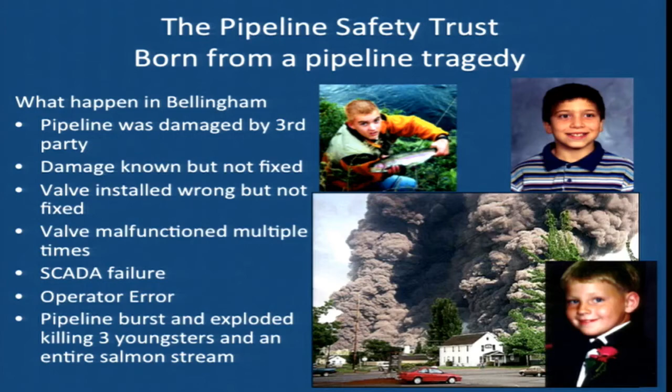Yep. SCADA, yes, I shouldn't be using acronyms. That's basically the computerized system that allows the operator in a control room, usually far away. A lot of the pipelines are controlled from Houston or Calgary or somewhere else. This one was south of Seattle, to monitor the pipeline, and they can shut off valves, increase pressures, reduce pressures, that type of stuff. And I should be able to tell you what SCADA means, but I bet one of the hecklers can tell us. Supervisory control and data acquisition. That's what I was going to say, yeah.

So ever since we came into being in 1999, there was a group that formed before the Pipeline Safety Trust Incorporated. We have really focused on changing federal law because, as you've heard this morning a little bit, most all of the pipeline safety regulations start at the federal level. The federal government sets the minimum standard. So we really focused a lot in the first 5 to 10 years of our existence on the feds and on Congress. And we've had success there. We've snuck a number of things into reauthorization through Congress.

We also try to increase a lot of access to pipeline information, and we've been very successful on that, mainly because the federal government thought it was a good idea too. There's so much information now, it's sometimes hard to figure it out. And the states are catching up with that too. We provide a public interest voice.

I go to all kinds of pipeline meetings and workshops, and often when you ask who's in the room, the public, I'm the only one sitting there. That's starting to change a little bit, but so a public interest voice at meetings, public interest voice with the media. I spend almost half my life these days talking to reporters.

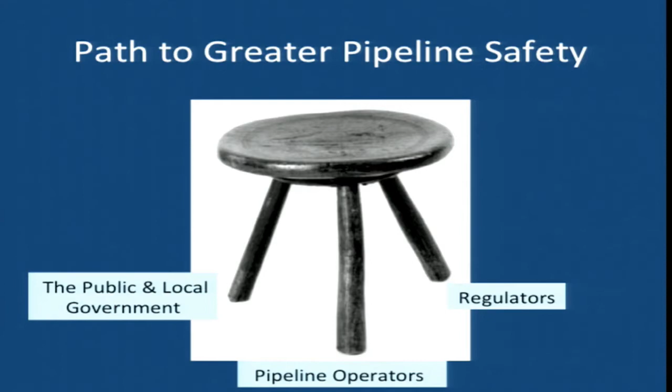One of our basic beliefs, and I'll sooner or later get to the Pipeline 101 stuff, is that, you heard the three-legged stool thing already this morning, where you need strong legs from regulators, operators, and the public and local governments. I'm not going to go through that again, you heard it. So here's the Pipelines 101 for the people that don't know it and for the hecklers that want to correct me. This is kind of a diagram of the natural gas pipeline system.

You can see on the left kind of the production side of things. The pipelines there in red for the most part are production or gathering pipelines. There were lots of questions this morning about unregulated gathering pipelines, because the makeup of those pipelines has changed a lot as a lot of these shale plays have come in. So then once they go through a processing plant, they move into transmission pipelines, which tend to be the bigger, higher pressure pipelines that move gas between facilities and between communities and across state lines.

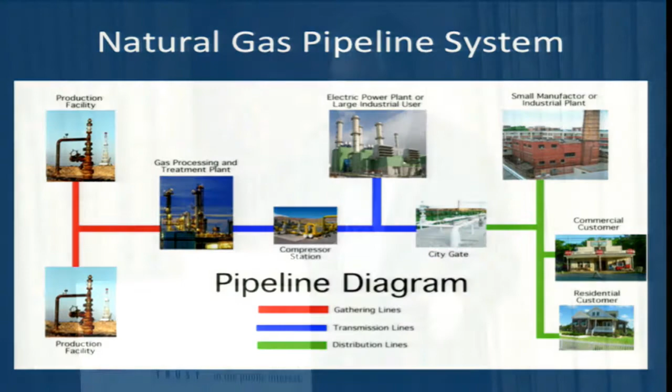And finally, it goes into a city gate, which is basically a way to ratchet down that pressure to deliver it to our homes and businesses through the gas distribution pipelines. So those are the three main types of pipelines on the natural gas side, and none of this stuff is completely black and white. Here's the same thing for hazardous liquid pipelines. It's basically kind of the same.

You have the same production gathering lines on the upstream end, moving into transmission lines, taking mainly crude oil into refineries, and then transmission lines moving refined product from refineries to wherever it's going to get distributed. The one difference with a hazardous liquid system is you don't really have a distribution pipeline system like you do with gas. The distribution tends to be through trucks and those types of things.

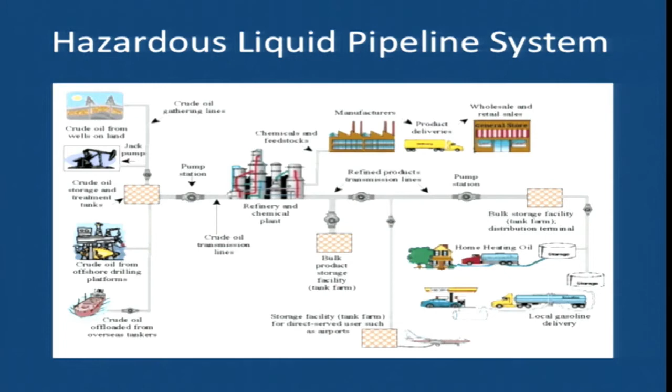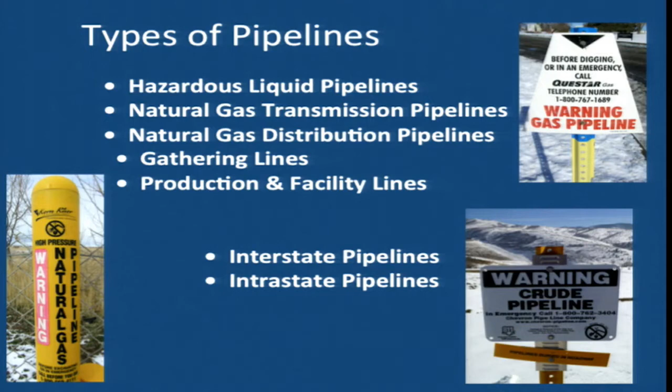Types of pipelines: we've already talked about hazardous liquid, natural gas, distribution, gathering, and production facility lines. I mentioned those in the diagrams. The other thing to remember is there are interstate pipelines. The easiest way to remember it is those are pipelines that cross a state line. It's not quite that clear cut, but that's the easiest way to think about it. If a pipeline crosses a state line, it's interstate. If it doesn't, then it's intrastate. And that makes a lot of difference because of who can and cannot regulate the different types of pipelines.

Just to make it clear, natural gas pipelines carry natural gas. That's really easy. Hazardous liquid pipelines carry a variety of things: crude oil, refined products, jet fuel, diesel, gasoline, highly volatile liquids, things like propane and butane, which lots of people think of as a gas. And if it was here in the room, it would be a gas. But when you put it in a pipeline under pressure, it moves like a liquid.

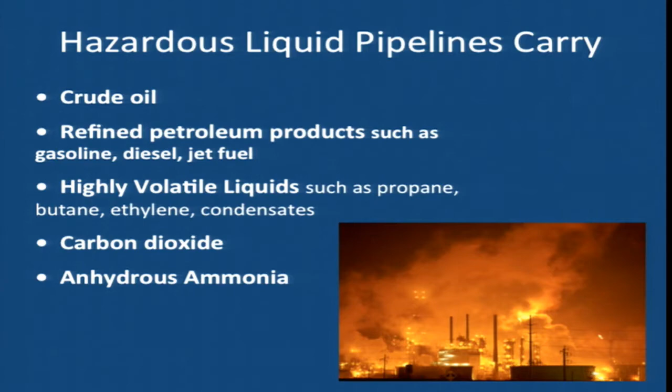And I mentioned that in one of my slides this morning of a big spill of ethane, because it's a very strange thing because it moves like a liquid until it gets out of the pipeline. Then it still moves like a liquid for a while until it starts to volatilize and turn into a gas. So for emergency response, it's a very unique creature to have to deal with. And carbon dioxide and ammonia are also moved through liquid pipelines.

I don't know if these numbers are up to date, but they look pretty accurate. The national pipeline system gives you the mileage of hazardous liquid versus gas pipelines. The one thing that's not very accurate in here is the gathering number, and I didn't really break it out much. I think Jeff showed a slide this morning that said something like 17,000 miles of gathering lines. Well, those are gathering lines that the federal government regulates. There are hundreds of thousands of miles of gathering lines that aren't included in these numbers that are unregulated, basically. So that mileage number for gathering lines is off a little bit. And you can see by far the biggest mileage is in the distribution system. It delivers the gas to our homes and businesses.

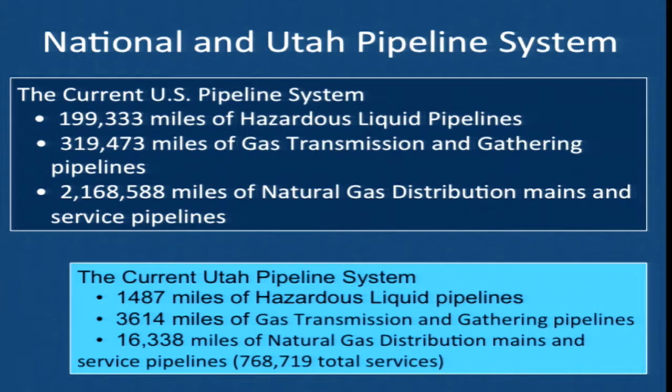Normally when I do this for a specific community, I break it out because specific communities are interested in what's going on there. So you see a breakout of the current pipeline system, and this was for Utah a couple of years ago. Yep.

How is it decided which of those gathering lines are regulated and which are not? It's basically a population thing. Gathering lines that run through urban, populated areas are regulated gathering lines, and they're regulated to a lesser degree than a transmission line going through the same area, but there are some regulations. If you're in a rural area below a certain density of houses, they're completely off the federal regulatory scheme, and you heard lots of arguments about why that is earlier this morning.

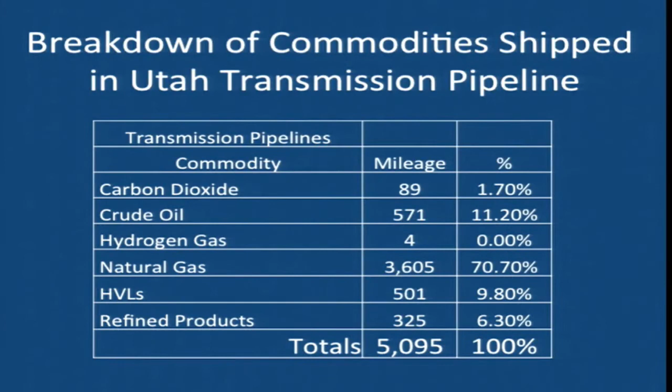I also show local communities the breakdown of what pipelines they have in their communities. And all of this stuff is available on the PHMSA website these days. It's pretty easy to get your hands on. So this just showed what Utah, which doesn't have a whole lot of pipes, had a few years ago, and what that percent is. And you used to be able to look at it at the county level. Since we were doing this in Salt Lake City, which has three or four counties there, I broke it down and showed them how it works out at the county level. For some reason, PHMSA's taken this off their website, and you can't get county level data anymore. I don't know if that's coming back at some point.

In a place like Salt Lake City that has a limited number of pipelines, it's always good to tell people who those systems are, and this is just the major systems that were going through Salt Lake City. If you were in a place like New Orleans or Houston or lots of places, there'd be way too many pipelines to try to list. So it made my job easy in Salt Lake City.

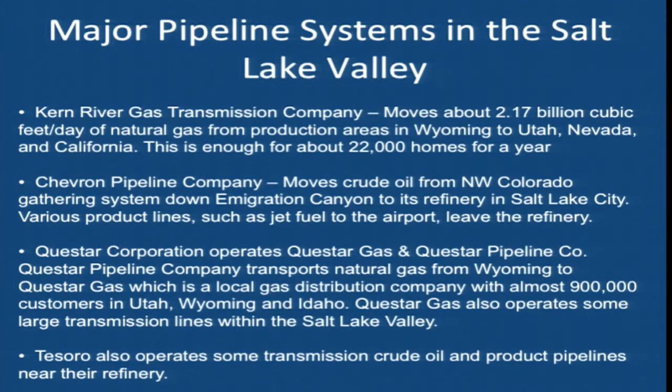It was interesting because at this University of Toledo meeting, everybody was freaking out about the pipeline under the Straits of Mackinac in Michigan because it was a Great Lakes Water Conference, and freaking out about a pipeline under the St. Clair River near Detroit, and that was all you were hearing about.

Well, I just drilled down, not knowing anything, into the NPMS and found out there was 15 hazardous liquid pipelines going across the mouth of the Maumee River right by Lake Erie that none of the activists in the room or the lawyers in the room ever knew about. And it's like, well, what about those ones? Oh, that's a good idea.

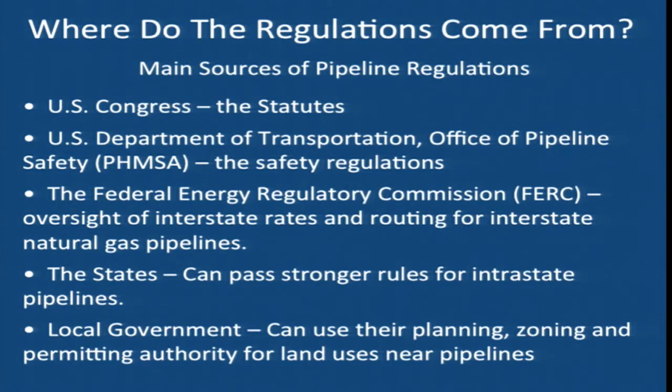So they set the standards, and then the Department of Transportation, PHMSA, Office of Pipeline Safety, whichever name you want to use, interprets those statutes and turns those into rules and regulations. And that goes through the same regulatory process that most rules do. There's comment periods, and some of those are open right now, a big one for hazardous liquid pipelines. So that's where the federal regulations come from.

There were questions this morning about routing, and for interstate natural gas pipelines, FERC, the Federal Energy Regulatory Commission, deals with the routing, and there is an environmental impact statement process for natural gas pipelines. As people mentioned, there isn't that for hazardous liquid pipelines or for intrastate pipelines. An intrastate gas pipeline that's all within one state does not go through FERC. That's left up to the states. And that's where states have some control. They can set up a process for dealing with that routing, and some states do a very good job of that, and some states don't.

And the states can actually pass stronger rules for intrastate pipelines. I've got a slide that shows most states have done that. It's over 1,300 rules that go beyond the federal regulations that states have created, mainly for intrastate gas lines. And then local governments have some control too. It gets pretty cloudy pretty quickly, but they can use their planning, zoning, and land use to control development encroaching on top of pipelines, perhaps helping steer pipelines through local communities, and making sure emergency responders think about these things.

What do the regulations cover? I'm not going to go through all of this, but yep. If you back up just a second, in addition to what you have listed there are a number of oversight and review agencies like the NTSB, GAO, sometimes the IG for the agency, who, as a result of studies or other investigations, make pretty strong recommendations about rules, and we heard some of that this morning, but those typically are regarded as mandates or near mandates for rulemaking as well.

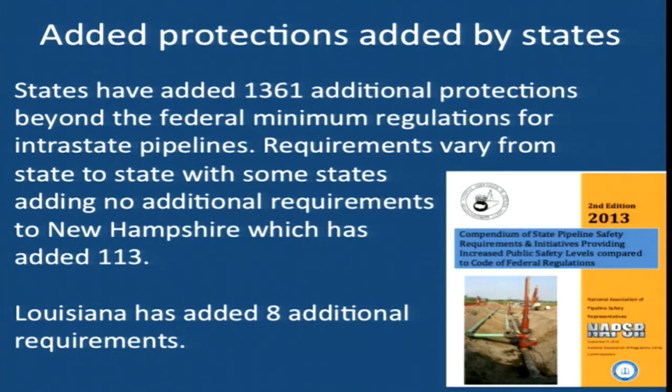In some states, I think New Hampshire leads the way on this. They've added 113 additional protections under their rules. And other states have done nothing. I think when I was doing this, Utah hasn't done anything on top of the federal regulations. I looked at Louisiana yesterday just so I could add that for some context, and Louisiana's added 8 additional kind of safety things above and beyond the federal regulations.

And I think that's why Jeff, when people were asking him about gathering lines, since most gathering lines are intrastate, it's much easier for a state to come in and perhaps create regulations on gathering lines because they don't have to go through a lot of the cost-benefit stuff that the feds have to do. The states may have some of that same stuff built into their systems, but some states could move much quicker, like Ohio did here a year or two ago. So that's a very interesting compendium for advocates that are looking to see what their state has done.

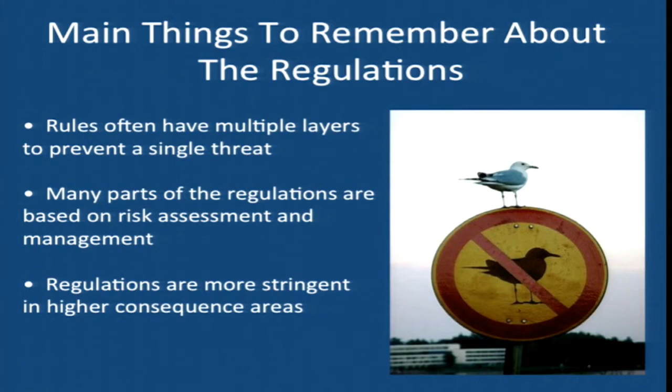And for hazardous liquid pipelines, high consequence areas are both a population thing and an environmentally sensitive area. So if you're in a watershed or a navigable waterway or a drinking water source, you're probably a high consequence area. Natural gas is based just on population density for the most part. And those are designations that the public, for the most part, can't ever see. You won't know if you're in a high consequence area or not, although anybody that thinks about it much can guess.

Prescriptive versus performance-based is a thing to remember for regulations too. A lot of the regulations are performance-based, kind of sets out a framework for how an operator ought to do things, but it recognizes that every pipeline's different, the terrain's different, so it allows the pipeline operator lots of flexibility in how they get there. Prescriptive would be more telling them exactly what to do.

And if you think about it as far as the interstate highway system, it's very prescriptive. You have a 70-mile-per-hour speed sign out there, tells you exactly what to do, and the regulator, the state cops, know exactly what to do if you're going 78. If you turn that to a performance-based system, you take down all those speed signs and just put up a smiley face that says drive safely. I don't know whether that would change safety on our interstate system or not. But it would make it really hard for a regulator, for the state cops, to know when they can pull somebody over.

People get confused. The media gets confused. Everybody gets confused about what is an inspection. And I bet I can get some heckling on this one. Because the word inspection is used over and over again. And there's really, in my mind, three main types of inspections.

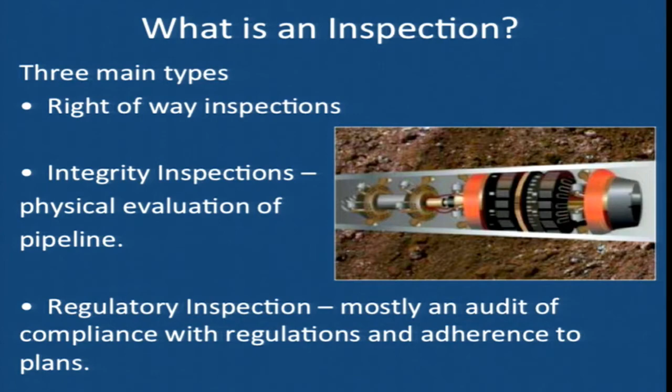You know, there's confusion that somehow the federal inspectors come in and run smart pigs through the pipelines, and that's not happening. That's left up to the operator, and based on their, oh, here comes the major heckler. And that's based on their integrity management plan. So that's left up to the operator.

And then there's regulatory inspections, which the regulators do. And to a grand degree, they certainly go out and kick the tires a little bit, but a lot of it is more of an audit function where they're coming in and trying to see if the companies are obeying the regulations, whether their integrity management plans they've drafted, they're following those. So that type of inspection is much more kind of hands-off. It's not a physical inspection as much as the other types.

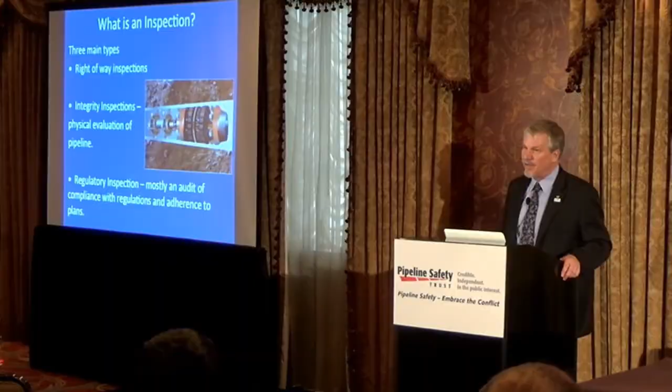The one thing that people often don't understand is that even with performance-based regulations, each company writes an integrity management plan, which could be very different from one company to the next. But once they adopt that integrity management plan, it becomes something that the regulator can enforce against, even if it's not required under the regulations. So if a company writes themselves a very good integrity management plan that goes way beyond the federal regulations, that becomes enforceable by PHMSA. I get that right, Jeff? All right.

Yeah. Question? Yeah, I had come across a study, and I'm just a citizen group, and we're trying to educate ourselves, so this is very helpful, that smart pigs came in third behind oil company personnel and ordinary citizens in identifying threats in terms of their record, and also that the data that comes from the smart pig runs is not available to the general public. Do you have any additional information on that?

I think you're getting two things confused. The second part, the data is not available to the general public, that's pretty much the truth. Sometimes it's not even available to state governments that want it. The first thing about the smart pigs coming in third, I think you're confusing that with leak detection systems. There was a study, and I think PHMSA funded it a few years ago, that looked at leak detection, because you heard companies over and over again saying, we have a state-of-the-art leak detection and we'll shut down a pipeline within minutes. And PHMSA did the study and come to find out that wasn't really the truth.

That the employees of the pipeline company that are just out and about there, or the citizens living near the pipeline, found pipeline leaks way more often than the leak detection systems did. And to some degree, they've changed the name. Some groups are not calling it leak detection anymore. They're calling it rupture detection, because they work pretty good. If the pipeline really bursts and releases all the pressure, those systems can identify that and deal with that fairly rapidly. But a small leak, those types of systems don't find them as much as the public. I think that was the study you're thinking about, maybe.

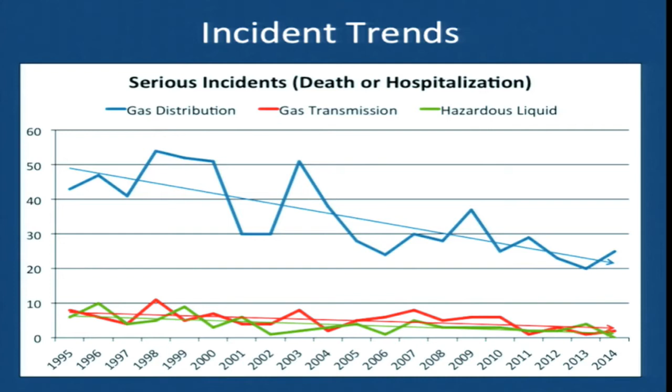You can see that serious incidents have been going down, although that's where most of the deaths and injuries occur, which makes sense because there's lots and lots more of those all over our communities in proximity to people than there are the other types of pipelines. And the hazardous liquid and the gas transmission is down there at the bottom, and they've been trending down too, and they're relatively low to begin with.

Significant incidents are also defined, and it includes deaths and injuries, but it also includes things like how much is spilled and property damage. And this is significant incidents over the last 20 years, more or less. And on the top is hazardous liquid. There's more significant incidents on hazardous liquid. The trend line over 20 years is basically kind of downward. It's kind of troubling if you look at about the last 10 years. It looks like that trend line has kind of turned and is going up.

Distribution lines, again, they're in the middle on the green, have continued to trend downward. I think a lot of that is because distribution lines get hit a lot by third-party excavation, and there's been a huge emphasis for the last 10 years now on using the one-call system, and I think that's starting to drive down some of the incidents on gas distribution lines. And over the 20-year period, transmission lines tend to be moving in an upward value, although if you look at the last 10 years, it's been pretty stable.

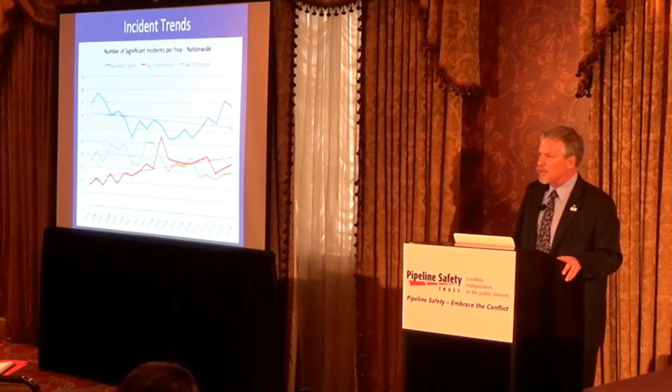And anytime you're doing averages like this, it's a little less than accurate because there's mileage increases that have been going on too on some of these, but if you put that in consideration, it doesn't really change this very much.

People also really like to know what the numbers are in their local community. So this is when I was doing it for the Great Lakes. I showed each state's number of significant incidents over the last five years, since 2010, and the property damage. This is for gas, both the distribution and transmission. You can kind of see how that works.

I think the take-home lesson on looking at the gas is that you see that the injuries and deaths are in the distribution side of things. And I think that's where Jeff was poking me this morning, because a lot of that tends to be excavation. If somebody's on a backhoe and they hit a pipeline, guess who's likely to end up dead or injured?

I like the fact that you're wearing your pin. Yeah, I do that just for you, Jeff.

It's important to note that on that property damage, we're actually toying with that, and Alan will pull that out in his presentation this afternoon. A lot of that is the operator. It's their property or their facility, so a significant part of property damage is the operator's actual equipment and facility. Yeah, and I've got a slide about that this afternoon too.

Okay, we'll see if Alan and I duel over that or not. Don't show up for that.

I believe one of the changes that you made in the incident reporting starting in 2010 is you actually break apart the property damage, so you can actually look at damage to the public versus damage to the operator. Right, so it could be the pipeline itself, replacing it. It could be the emergency.

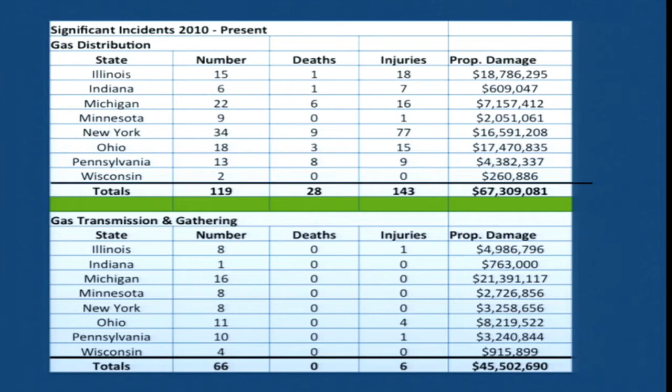And there's even an argument now, and you'll hear this a little bit this afternoon too, I think, that the property damage from release of natural gas has never really been counted in, and now as we're starting to understand methane and climate change, the question is, should we be somehow treating that as property damage, as a spill like we do for liquids?

Can I ask, where are you getting all the data from? This is all from PHMSA. Yeah, and we walk people through their data a lot, so if people are interested in this type of stuff, call us up and we can tell you where to find this. This type of incident data is pretty easy to find on their website.

And sometimes there's a lag between when the costs are reported because they can amend their incident reports. I poked a stick in my thing this morning about the Refugio spill in Santa Barbara. No, it wasn't that. It was the Yellowstone spill that happened in January, because if you look at that, it says there was no emergency response property cost at all. And Jeff has gone and fixed that now and is going to contradict me. You're actually right, because after you said that, we texted back to Blaine and said, what the hell, Carl is saying this, and he came back and said it's true.

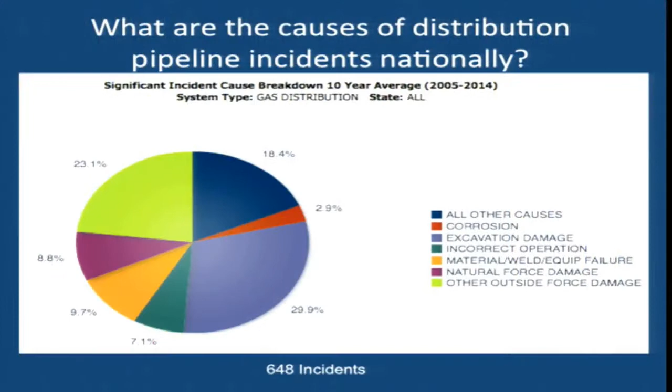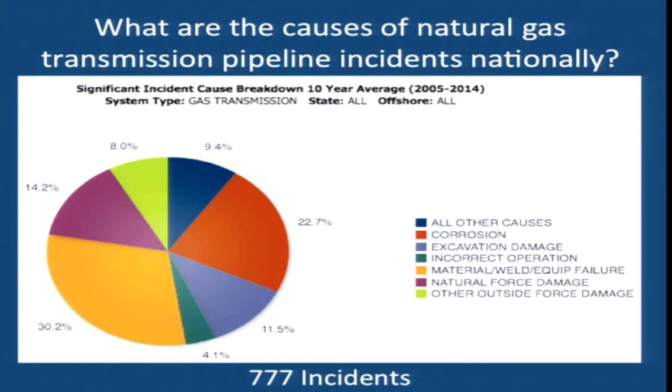So this is California. Nationally, California, you can see they're fairly similar. Gas transmission nationally, the take-home message here is it's not as much excavation damage, it's more things like welds, equipment failures, corrosion. When we looked at this for California, it jumped out because that chart is quite a bit different. And I think it's excavation damage. You have to also look at the number of incidents because over 10 years there's only been 37 incidents. So it doesn't take very many to start skewing these types of charts.

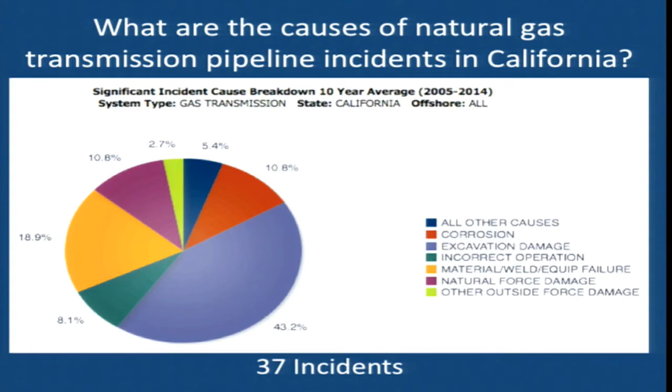If you look at this a different way, and I encourage you to, in the tool that we're revealing this afternoon, and Alan will be talking about it, you can go into it by consequence. While you might have fewer by a frequency analysis, by consequence, this weekend and a couple of months ago, I know there were people killed by excavation damage, by doing the wrong thing, digging in there. 3 injured, 1 dead. They shouldn't have been doing that, but it's the high consequence, not as frequent maybe. So look at it from both sides, frequency and consequence.

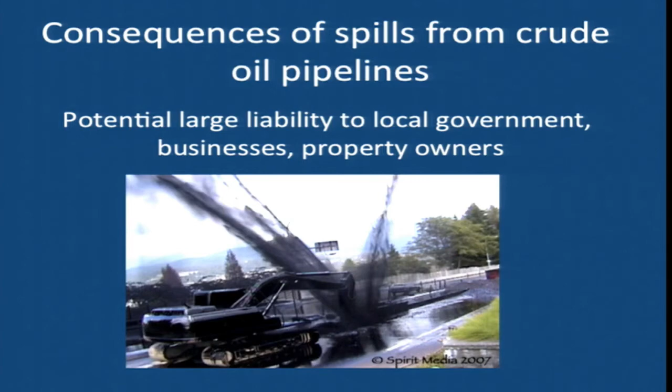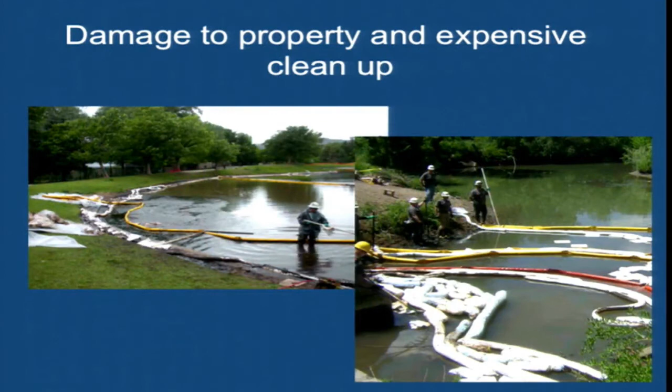Consequences from crude oil spills are a particular liability for local governments. This is an excavation damage that happened near where I live. And I think this finally got out of court, but it was in court for a number of years with the pipeline operator arguing with the local government. It turned out the local government hadn't located right, and the pipeline spilled and the oil ended up in the ocean. Lots of damage from liquid pipelines or crude oil pipelines to the environment. This was a spill into the Kentucky River a number of years ago; it closed down the drinking water source for Louisville for a while.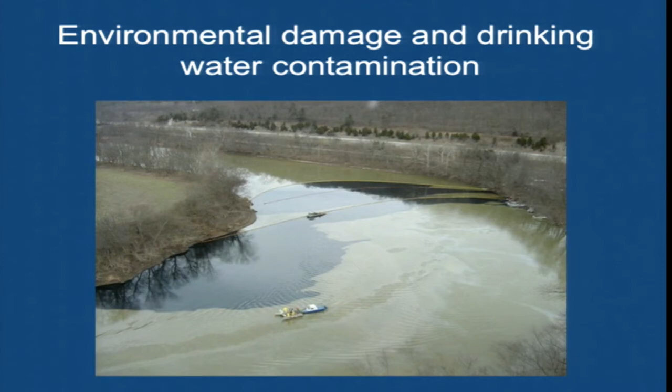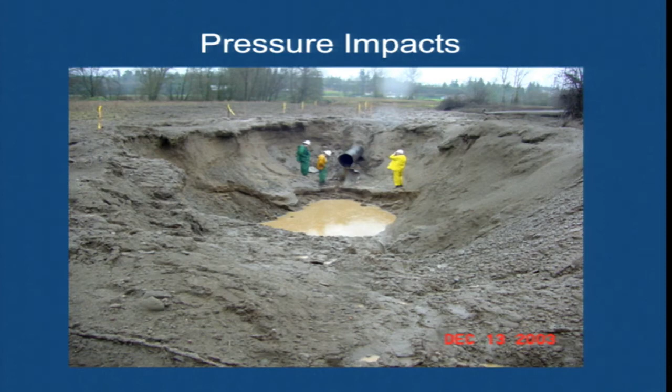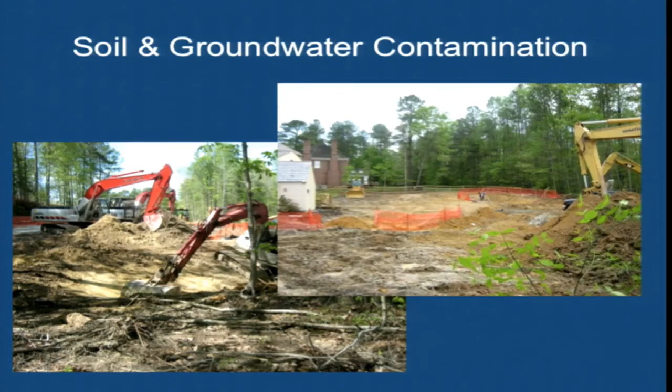Natural gas pipelines tend to be more explosions and fires. Even just the pressure. This is a picture of a pipeline that failed in Washington State. There was no explosion, there was no fire. This is just the pressure of the gas coming out of the pipeline. I mean, when you put a big pipeline under that pressure, it can dig a pretty big hole when it fails. Liquid products tend to be pretty close to crude oil. They will catch fire a little more often, and they can contaminate soil and groundwater. So that's the consequence versus the probability.

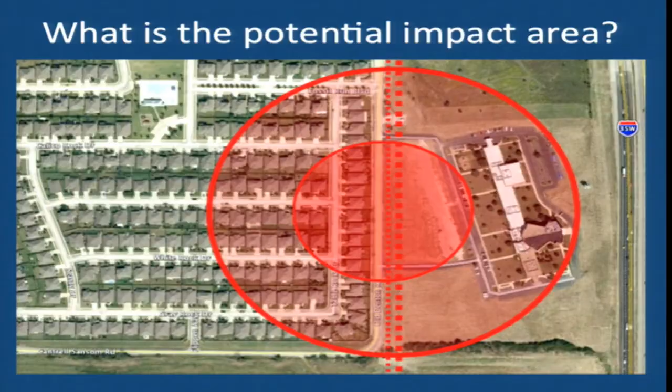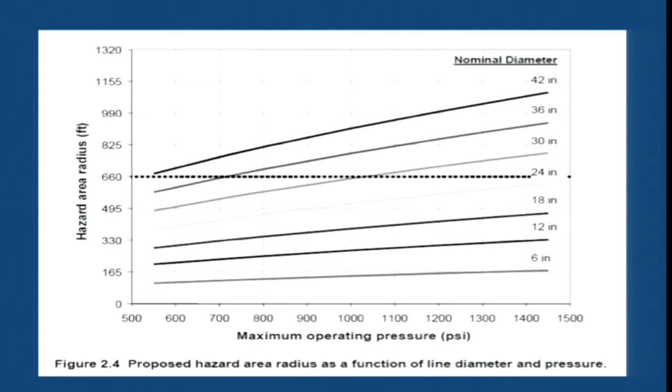Lots of things change the way this would actually act on the ground. Like that neighborhood on the left there has, I think, a sound wall along the street. That sound wall would probably act as a barrier and protect those homes behind it to some degree. And this is just basically out of the study that created the whole potential impact radius. That shows how the calculations between operating pressure and size of the pipeline change the impact radius.

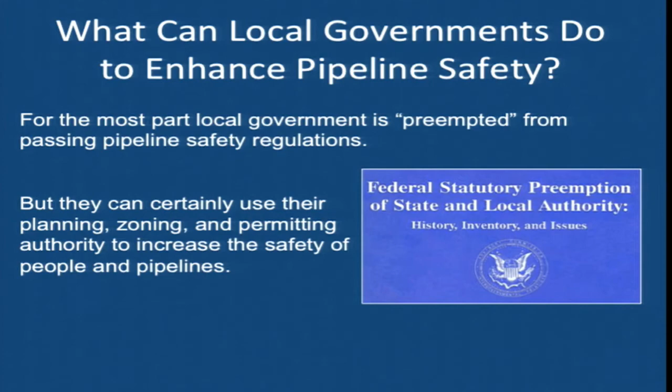Just quickly, there's lots of things the local government can do to enhance pipeline safety. I'll talk about some of those for a little bit because I think that often gets missed. Oftentimes, the local government is told they can't do anything, that they're preempted by federal statute, and that's true. Local governments can't require a pipeline to put in thicker pipe or more valves or that type of stuff. Everyone that's tried that, I don't know anybody that's gotten away with that, because they're preempted under federal law or state law often. But they can do a lot of stuff using their land use planning near pipelines, which was a huge issue that Jeff mentioned this morning. The Pipelines and Informed Planning Alliance was a group that put 130 smart people in a room to try to figure out what could be done by local governments.

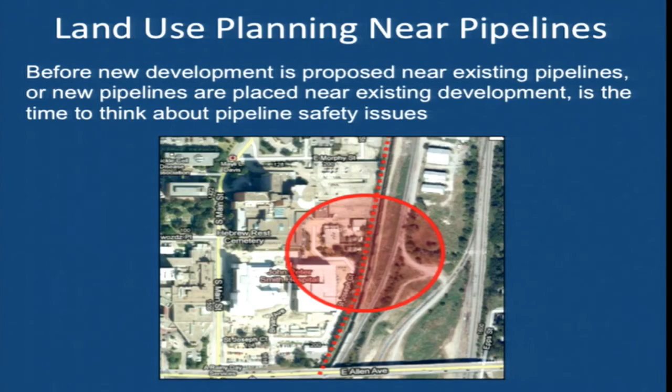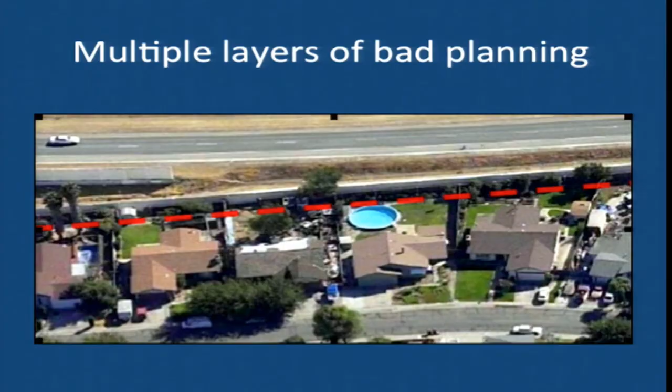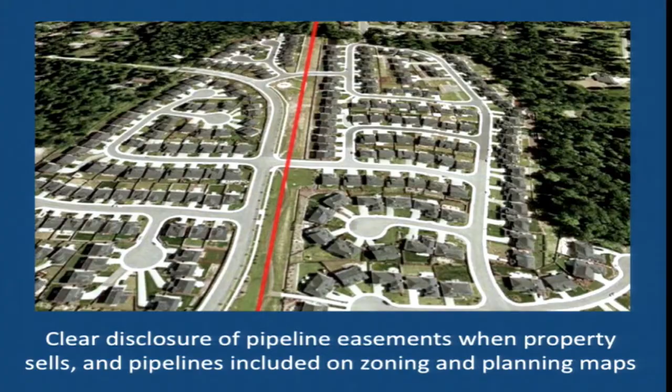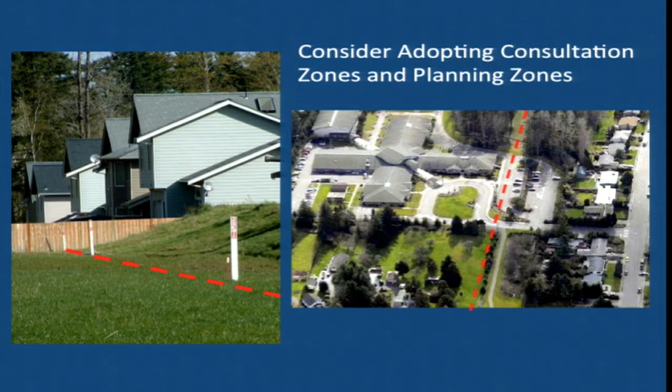The picture on the right there is a school that went in. The pipeline was there first, and the school district wondered why they got such a screaming deal on this property. Well, it's because they had a pipeline right through the middle of it that they had to put the school in then. After the Bellingham tragedy, people got up in arms and pretty much forced the pipeline company to at least replace the 50-year-old pipeline with a new pipeline there next to the school, especially when it failed after a hydro test right near there.

Lots of issues for local government about emergency planning. The industry spends millions of dollars each year trying to get fire departments, police departments to pay attention and think about these types of things, but often there isn't much emphasis for the local governments to listen to that message. So there's a continual push to make sure that local governments are making sure their emergency people are paying attention and are well trained in case, in the low probability, that something goes wrong.

And you've heard a lot about 811. When you talk about what the public can really do, the number one thing, because of all the miles of distribution pipelines that are in anybody's yard that has gas, is to know enough about this. So if you're going to plant a mailbox in your front yard or plant a tree or something, you call 811, or certainly if you're hiring a contractor.

Or, as I was doing the other day, I was driving down and there was a contractor excavating just down the road from me, and as I drove by, there were no marks anywhere on the sidewalk. So I called the planning department and said, did these people get a permit for what they're doing?

We've passed an ordinance in our county that requires any excavation. If you're coming in for an excavation permit, they won't hand you that permit until you show that you've called the one call. Because we have a computerized system in Washington State that they can look it up while you're at the permit counter and figure that out.